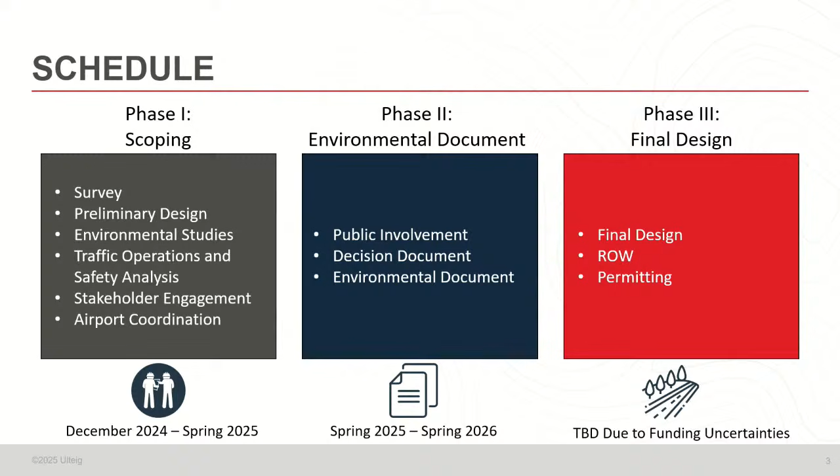Real quick, before we go too deep in the alternatives, I want to call out the known constraints that need to be taken into account when you're evaluating the alternatives. Key ones in this area are the gravel operation on the southwest corner of the intersection and the English Coulee watershed drainage ditch on the southeast corner of the intersection. There is a water booster station owned by the city of Grand Forks, which feeds both the airport and the Grand Forks Air Force Base, in the northeast corner.

And then most importantly, we have the runway protection zone off the Grand Forks Airport, which actually falls through US 2 on the south side. Those are very critical as you're looking through these alternatives, because all the alternatives will have different impacts on each.

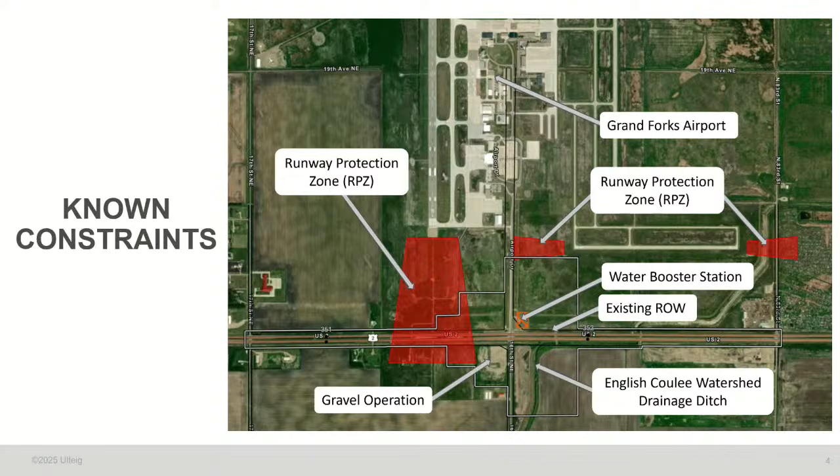Real quick, what we've completed to date: we've done all the field surveys. We've conducted a traffic operations report. We've completed the environmental studies, to include wetland delineation. We've had robust engagement with our stakeholder working group, which includes the city, county, MPO, and several others within the area. We've conducted a management presentation with the North Dakota DOT, and we've completed two public input meetings in November. I apologize, I said December. It was actually November. Time flies.

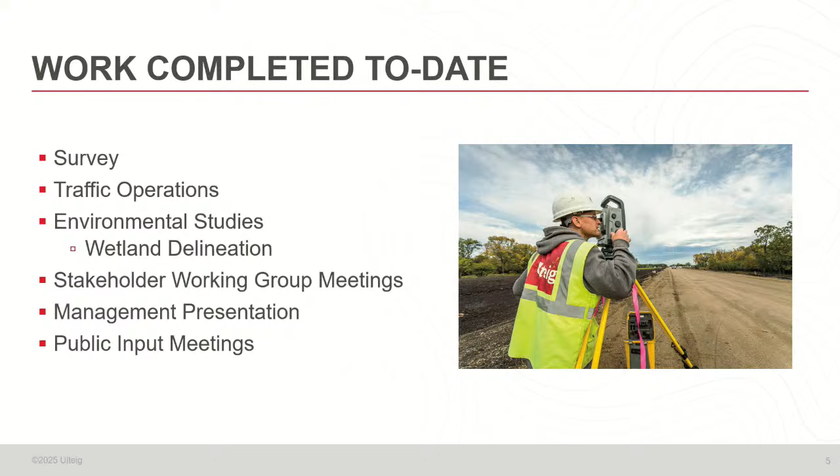So real quick, I do want to highlight that we've had a very engaging group of stakeholders. We've held four meetings. These first three are prior to the public input meeting, just to make sure we are aligned with all the organizations that have a stake in the project. To highlight, not all these words, but we started out this project with 12 different alternatives, really trying to figure out what works for this intersection in this corridor. In that first one, we discussed the existing geometry, reduced conflict intersection, revised geometry, staggered T intersection, roundabouts. Like I said, you name it, we discussed it.

With that, we saw a pretty quick delineation of steering towards the roundabout and interchange alternatives, just based on how traffic operates in this area and what we believe folks would be more amenable to, which led to our second stakeholder meeting, which really dove a little bit deeper into the interchange options and the roundabouts and just gave more information. And you'll see on the right-hand side there, a pulse check with all stakeholders. We started driving further into that roundabout alternative option, with the interchanges still within reason.

This led to a September 8th meeting, just really trying to hammer out what we wanted to show the public, so all the stakeholders were aligned. With that, we were still holding on to that roundabout alternative being the selected alternative of choice, with interchanges really close there too.

While we were doing the stakeholder meetings, we did hold a North Dakota DOT management presentation. I just wanted to talk about their guidance and feedback from that. When we went through the presentation, they really focused on the background and project overview, which all of you are aware of, this intersection and the issues that we've had over the years; schedule, known constraints, the alternatives still under consideration, traffic operations, and cost and funding.

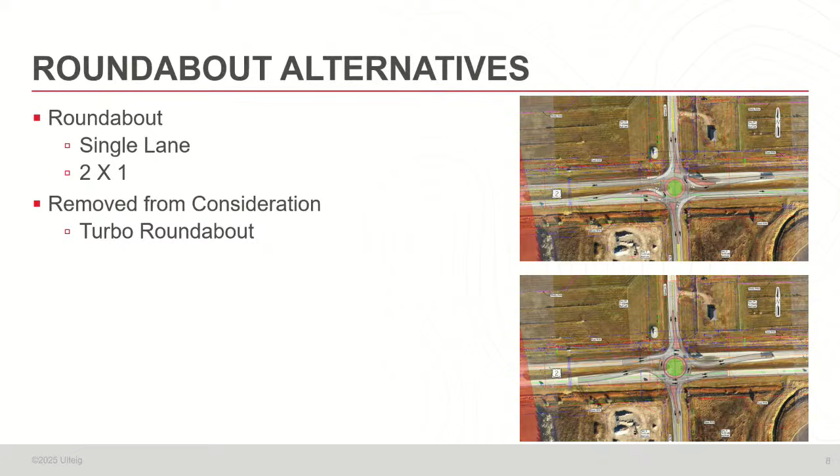On the interchange alternatives, you'll see here a diamond interchange. We called it a shifted diamond interchange. Essentially what we had to do to stay outside of that RPZ was move the interchange or the County Road 5 and Airport Drive about 300 feet to the east. What this does is it pulls those ramps going back onto US 2 away from the RPZ, so we're not introducing vehicular traffic within the RPZ. If we do impact that RPZ, we have to do a little bit more analysis in coordination with the FAA. But generally, good rule of thumb is don't impact RPZs. It's there for a reason. With that, once again, the partial cloverleaf, we pulled that away just to allow for those detours of oversized equipment.

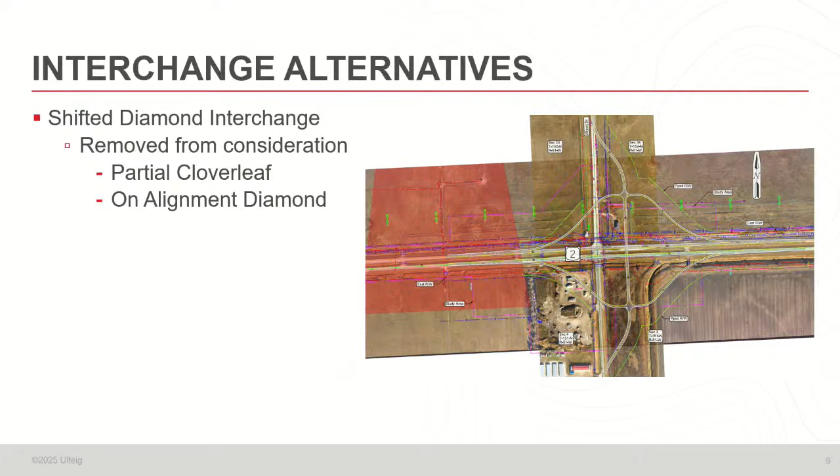Real quick on cost estimating and funding. As I said before, after the management presentation, they really had us do a robust analysis on the cost estimate. With that, they wanted to focus on inflation to make sure we have today's dollars, but how does that look in the future? With the roundabouts, we found it feasible to be able to get through the planning, design, environmental, and then ultimately construction within the next 4 years. So with that, we estimated $6.3 and $8.9 million respectively cost today, leading to $8.5 and $12 million cost in 4 years.

For the diamond interchange, with the amount of study needed to push a diamond interchange forward, that's going to lengthen out your environmental phase and then ultimately your final design and right-of-way costs. We'll talk about right-of-way a little bit here in a bit, but there will be right-of-way acquisition, which also lengthens that project development lifespan. And then overall, just getting funding and planning and construction, we're looking at about 10 years for the diamond interchange. So with the today's dollar of $46.2 million, 8% inflation, we're looking at $99.7 million in 10 years.

Real quick, with all this in hand, we did conduct 2 public input meetings. I just want to give a shout out to the Alerus Center, City of Grand Forks and Grand Forks County. They got us into the Alerus Center for free and really helped with participation. Number of attendees, we had 83, which is a pretty decent number. Results, we had 16 comments via email, mail, phone calls, and then 10 comments received during the Q&A portions of the public input meeting. Just a summary of what we saw in those comments.

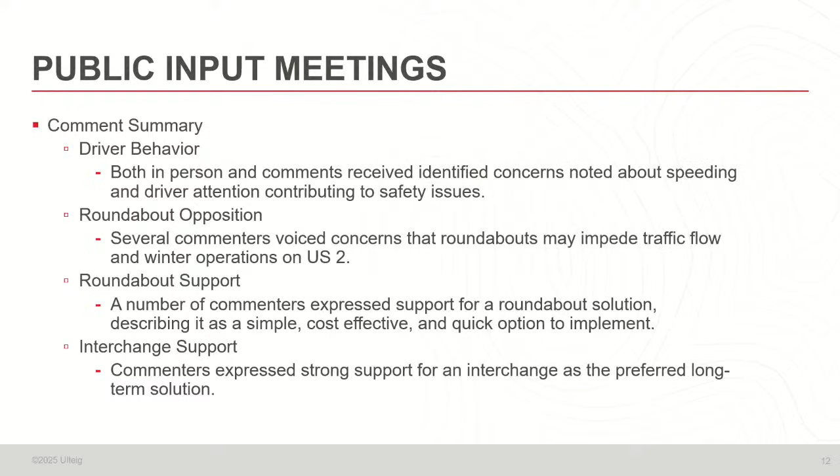As far as interchange support, I will say the interchange probably still had the strongest support, just for the fact that it's a very long-term solution. Allows US 2 traffic to not slow down, not stop, not be impeded, keep their speeds up there, and also County Road 5 and the airport.

Generally, public opinion favors the interchange alternative as it's familiar and known to them. The roundabout alternative supporters favor it for cost and expediency. There are, once again, lots of comments on speeding, distracted driving, and driver behavior. It's really tough, that doesn't fall within the scope of this project we're talking about today, but there is a lot of concern from the public on those items.

So real quick, before we get to the decision document, we did hold one more stakeholder meeting after the public input meeting and shared all that information with them. And we had a resounding collaboration, cohesion around the roundabout option, mainly because it is something we can implement in the near term. So overall, the next step is the decision document.

It's going to outline purpose and need for the project. The alternatives we put forth in the decision document are alternative A, no build, a roundabout single lane, a roundabout 2x1, and a shifted diamond interchange.

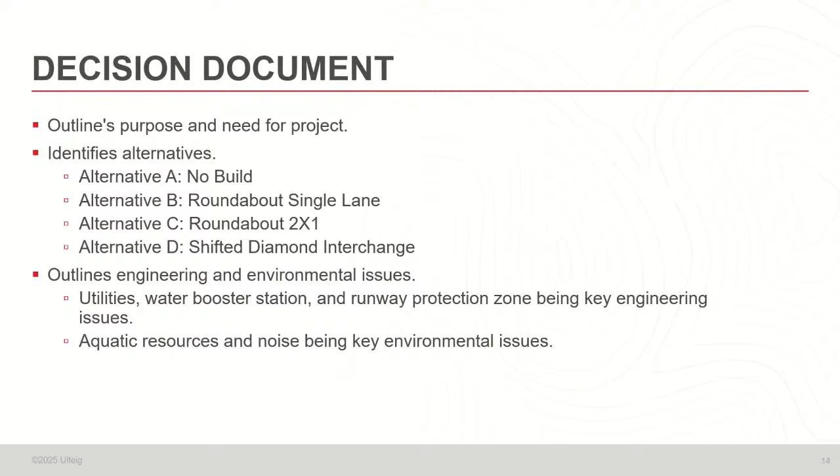Engineering environmental issues, just to keep in mind, utilities, there will be utilities impacted throughout the corridor, the water booster station, the runway protection zone being key issues. And then on the environmental side, aquatic resources for both. And then if an interchange is introduced, we'll have to do a noise analysis to determine what the impacts are there.

So real quick, I'm not going to read all this verbatim. I'm just going to highlight some of the key pieces. Both the single lane and the 2x1, they're both going to give you greater operational advantages to what's existing today. They are going to be able to handle future traffic. We did the 2050 timeframe for traffic analysis.

They are going to reduce crash potential and severity at this location. And there's going to be fewer stops and hard accelerations at this location. Versus the interchange, they're going to be lower cost, quicker to implement, and minimal right-of-way needs.

Some of the disadvantages to the roundabout is complex phasing, which we can figure out as we get there. And then traffic will still need to slow down and yield before entering that roundabout. That is something the public kept asking, and I want you all to be aware of. Yes, you will have to slow down as we get to the roundabouts.

Two differences between the single lane and the 2x1 I want to call out is the single lane had a little bit less crash potential than the 2x1. The 2x1, what we're seeing is there may be the potential for large truck traffic to encroach on adjacent lanes as they go through the roundabout.

The advantage that the 2x1 has over the single lane is it has greater operational capacity for future traffic. And then as far as the northbound, southbound minor legs, they're able to get into that roundabout quicker than a single lane. A single lane might have to wait for that gap to open up on US 2.

As far as the shifted diamond interchange, the biggest advantages obviously are you're maintaining continuous flow on US 2, eastbound, westbound, and then County Road 5 and Airport Drive, northbound, southbound. Reduced travel time due to less congestion, and you're going to provide greater operational advantages in the future. Everything we're seeing for numbers, you're not going to put that interchange at capacity.

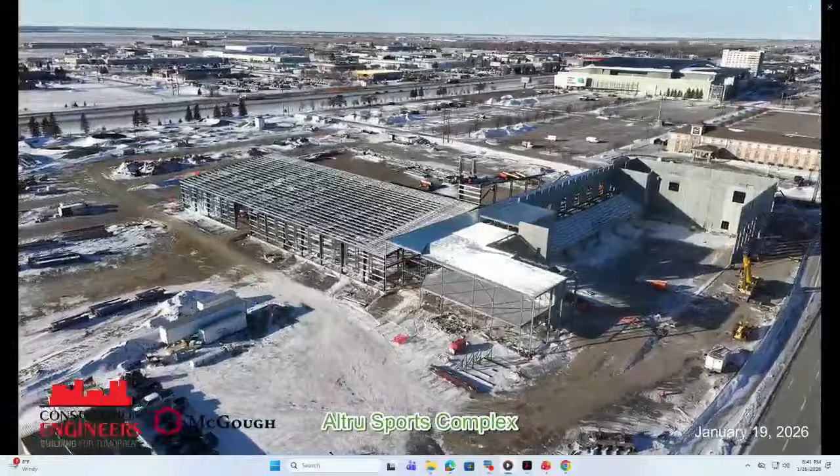Good evening, Council. So I think we're going to start with a phase 1 update. So we have a drone video here from McGough Construction and Construction Engineers. I'm quickly going to turn over to the McGough team here to give us an update on phase 1. They're the ones out there all day in the cold here. So I'm going to turn it over here to Brian. Give us a little update here on phase 1 and what you're seeing here.

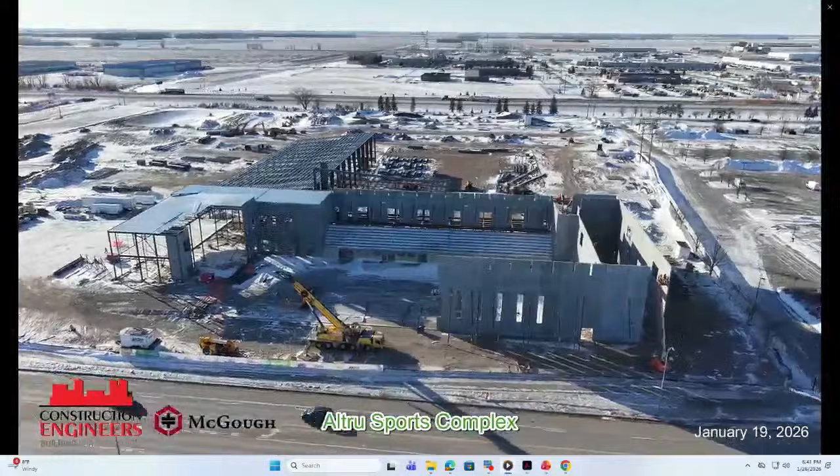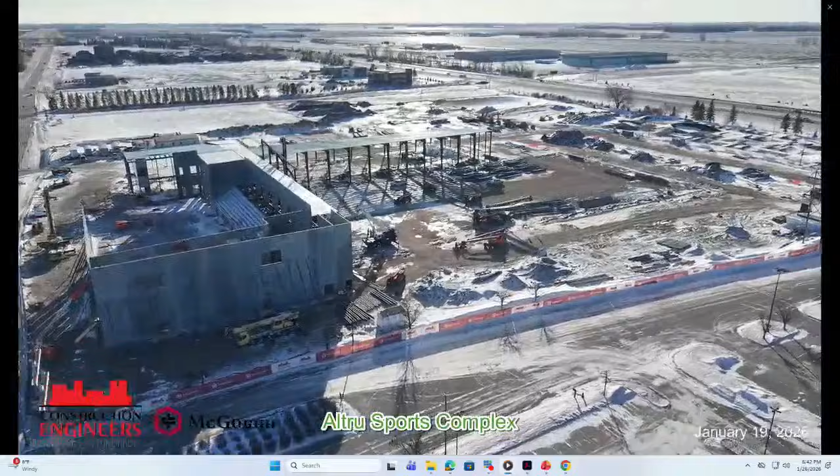Yep. So I'll take it. Good evening, committee members and Vice President Wago. I'm Brian Lambrick, Senior Project Manager with McGough Construction. So I oversee the day-to-day operations of the Altru Sports Complex project here. What you see in front of us is a drone video that we took last week on Monday.

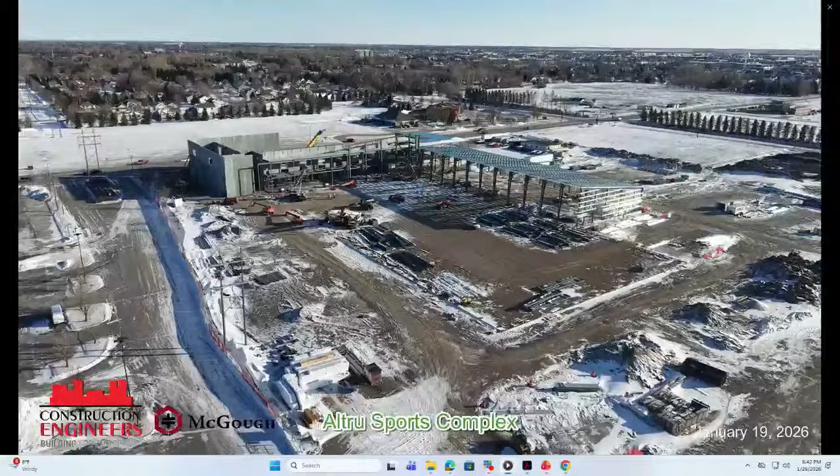Really the course of last summer and this fall was we were really focusing on all of our underground activities, foundations, site utilities, getting the pool slab down, all the underground plumbing for the pool. All of that's in place currently and buried now. And really, if you've driven on 42nd in the last couple of weeks, you'll notice that all the structures are really coming up and out of the ground.

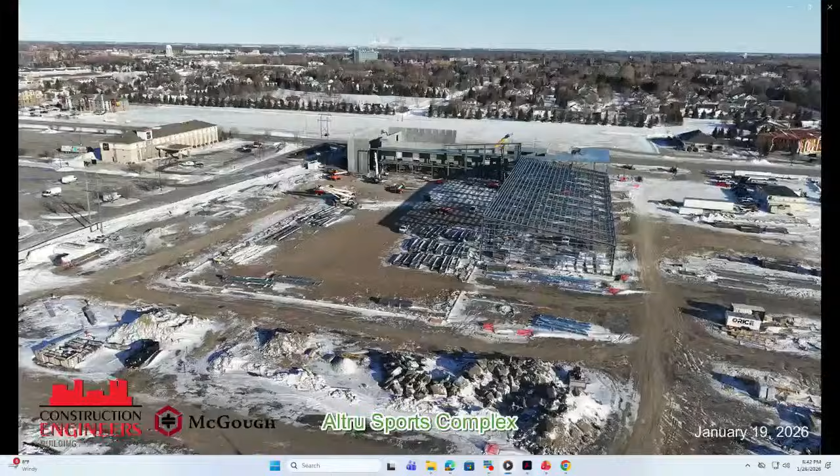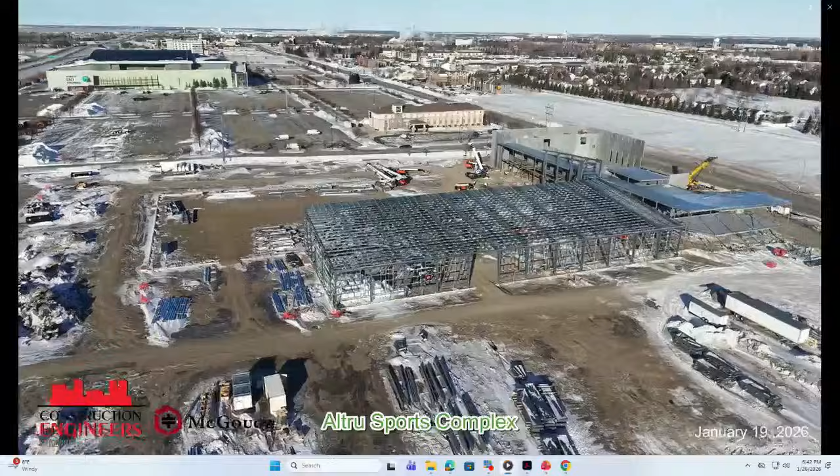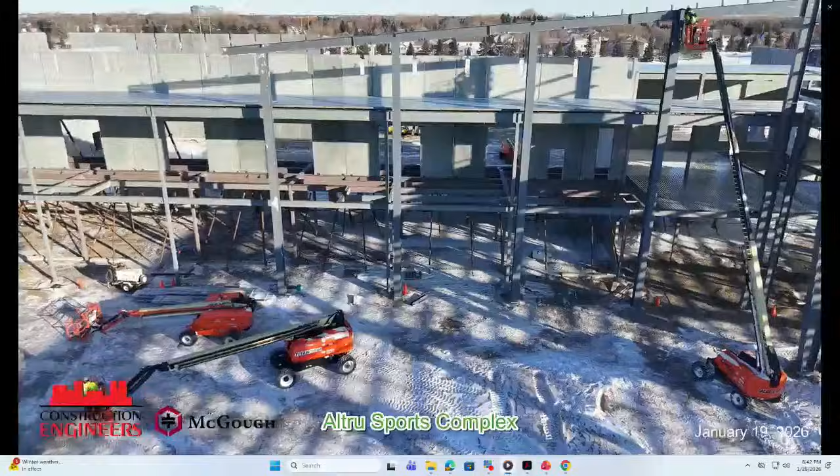So what you'll see in front of us right here, that silver box right in the front of the screen here, that's the pre-engineered metal building for the pickleball courts. That structure is complete. Really now it just needs to get enclosed and wrapped up. What you can kind of see here is just the start of the end wall of the turf. So that angled beam across the screen, that's the end wall for the actual turf pre-engineered metal building. And then behind that, you can see the concrete panels. Those are the precast panels for the natatorium space.

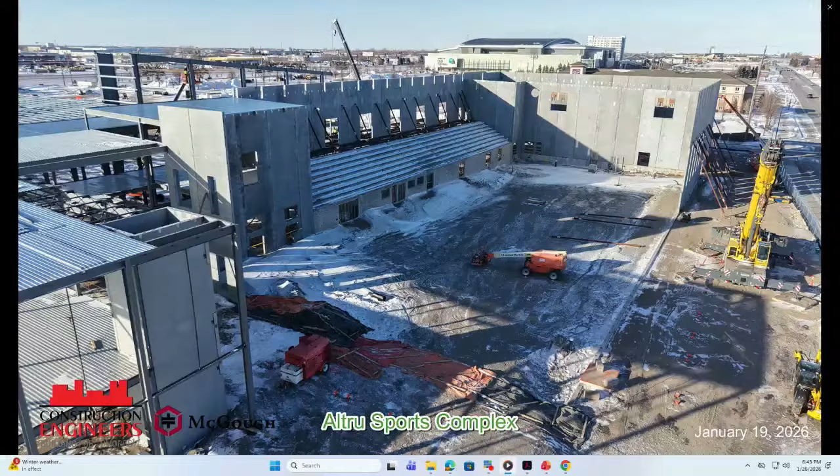Again, here's another view of that natatorium space. What you don't see where that orange lift is sitting right now, buried underneath that, there's about 5 feet of sand and gravel covering all the pool base slab and plumbing underground, things like that. So as of Wednesday last week, all that precast is erected. So you can kind of see it wasn't finished as of Monday, but now that work is complete.

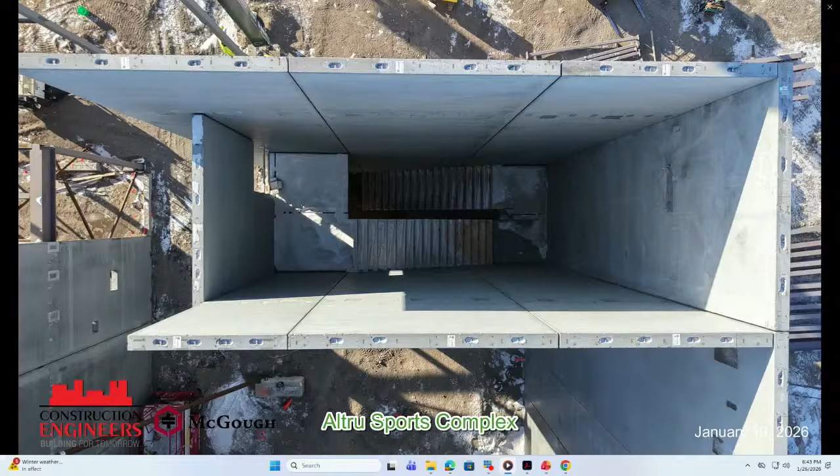So really, the rest of this winter is just going to be focused on getting all of our structures up. From there, we'll kind of roll into our enclosures, getting the building weather tight this spring and summer. And then really that last year or so of the project is just going to be doing the finishes and fit out inside the building.

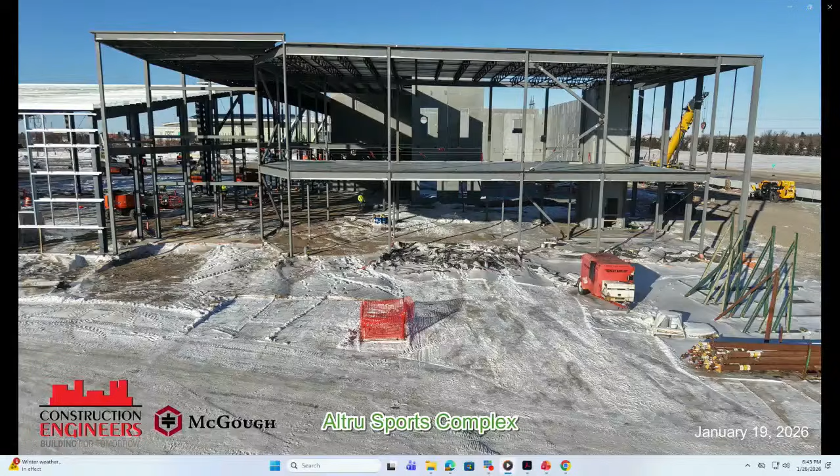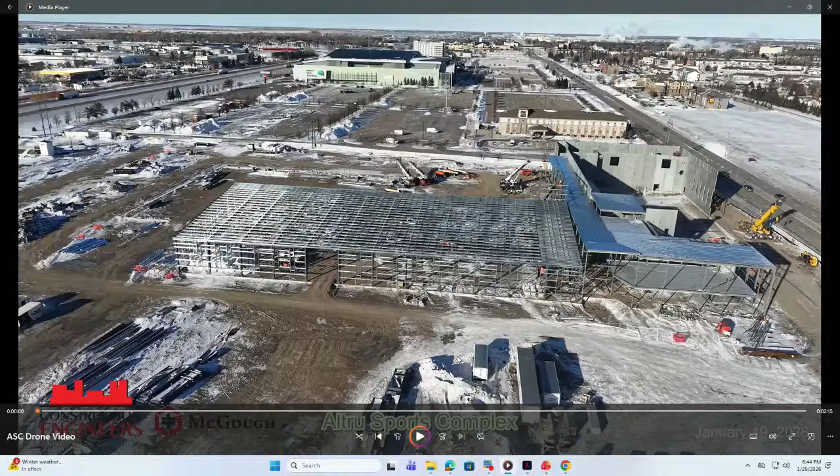So ultimately, construction is going very, very well. We're on schedule, still tracking for a September completion date of 2027. And then we're still on budget. We're actually slightly under budget, which we'll talk about when we get into some of the phase 2 numbers here. So any questions on current construction status? No questions. Awesome. Thanks, Brian.

Appreciate that. Well, when we switch gears here to phase 2, the bulk of our presentation tonight will be on phase 2 and giving that update. So let me switch gears to that presentation. So where I will start today is going to be on schedule. So this is the project schedule for phase 2. I'll call your attention to the top blue row there, schematic design and programming. This is the phase that we're just completing and what we've been doing over the last 16 weeks.

So we've had a couple of really, I think, in-depth stakeholder meetings with the Park District and some of the community organizations out there for basketball, volleyball, wrestling, etc. Really, as we work towards refining the design concept into a plan, a program, and a budget to move forward, which is why we're here today to present that to you all.

The next steps that we would have here, as Mr. Phelan mentioned, are to move into the next phases that we're requesting to do more refinement and to get more detail and to really work towards that market and budget numbers. And so design development, construction documents, and 2 bid packages would occur, which is a very similar process to what we did for phase 1. The idea is to do the expedited project delivery. I'll show that here in just a couple of slides to kind of remind you all what that is.

But the intent is to overlap our phases, get to the market soon, really have some of that time savings so we get out there, especially when we have phase 1 already under construction, the construction team already out there. There's a lot of savings we can have as a project to get this out to the market and under construction at the same time that phase 1 is out there.

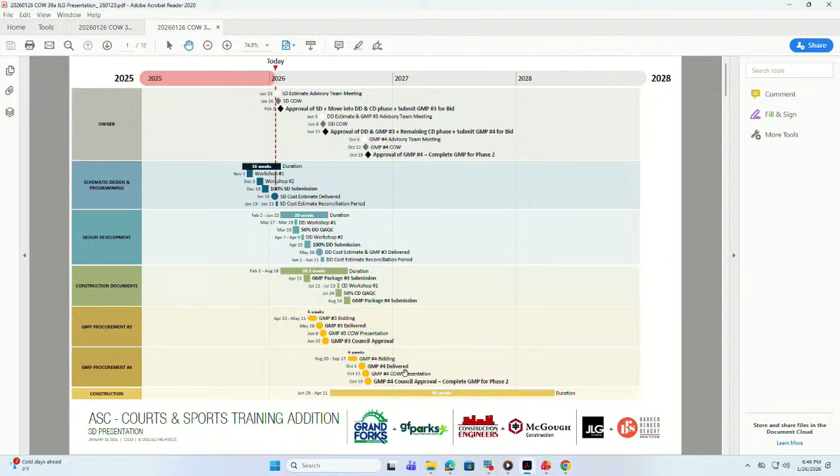I'm going to transition over to budget, and so I'm going to call up here Oliver Finman to talk about the budget. Again, some good news here on where we stand today, and we'll give you a rundown of the budget numbers for the whole project. All right. Well, this document should look familiar, as this was the same document that we used for phase 1.

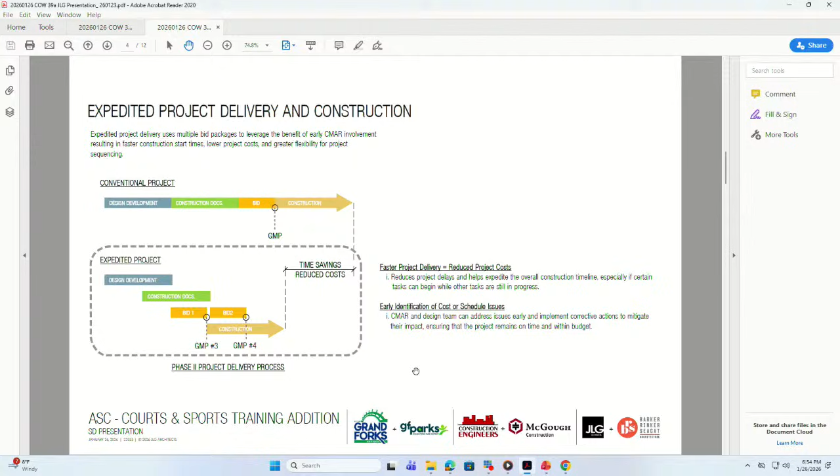And the reason why, and Mr. Vien, you're leading to that too, a little bit of escalation, is we already have a team out there under construction. We want to get out there. We really want to realize those project savings that we can have by getting out there sooner rather than later. So just a recap of why we're asking to do this process and to do it that way. You can see here with GMP3 and GMP4, some of those reduced times help to create savings. So very important to understand. But again, the same process that we did last year in phase one.

In addition, just to let you know what is in GMP3 and GMP4. So again, GMP stands for Guaranteed Maximum Price. These are final drawings and specifications for bidding purposes. And so the first one, GMP3, that we would ask of you here today, would go out in April, would come back to you here in June, and would cover about 55% of the scope of phase two. That would encompass all of the building foundations, all the building structure, and the building enclosure. Again, almost identical to what we did back in phase one.

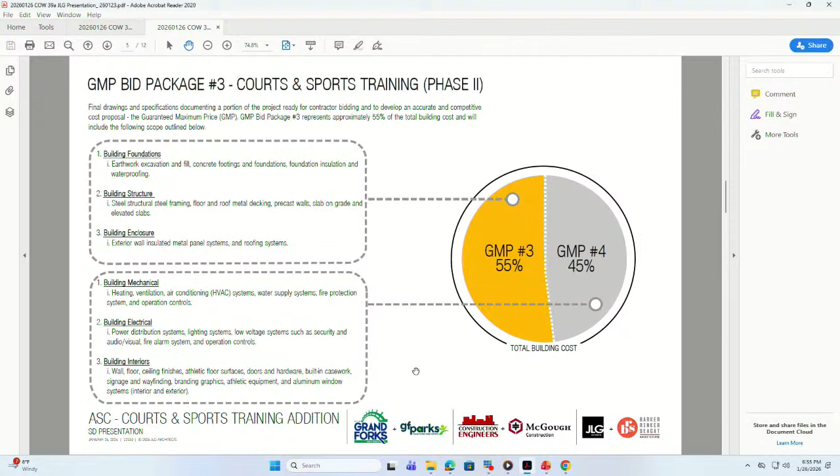When we come back again, as long as things go to plan, in August and then October, that's going to be for everything else really in the fit-up of the building. So all your mechanical, your electrical, and a lot of your interiors, the gym flooring, etc.

So a little bit of the fun stuff here. We brought a few slides from the schematic design package that we delivered to the city and to the park district. And so we're not going to go over the whole package, but just a few choice here to give you an update on the design and where things lie. Very similar to what you saw with the concept plan back in last fall with a little more detail to it. But we'll cover the site here real quick first.

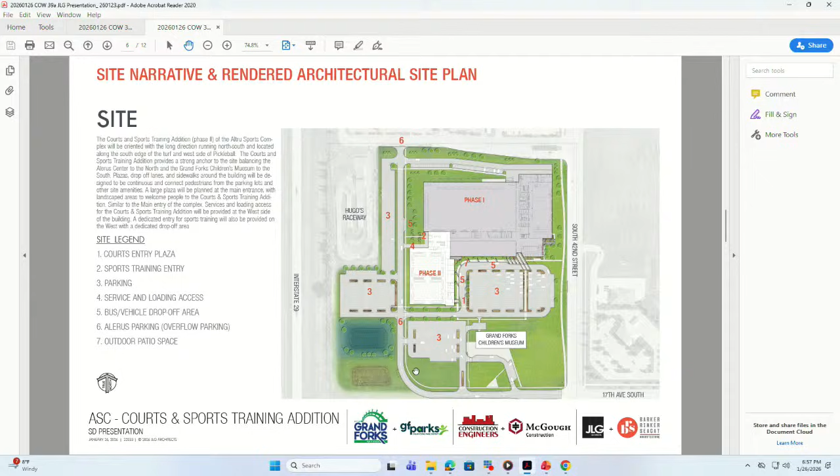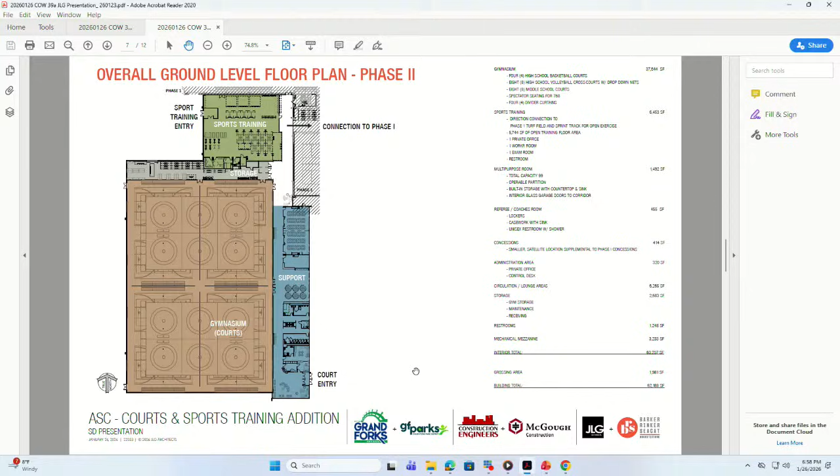We'll jump right into the floor plan. So we are just a little bit over 62,000 square feet, primarily on one level. We do have an elevated level for the mechanical mezzanine and the mechanical equipment. It's about 3,000 square feet. So pretty small, but the majority is going to be on the main level and really 4 main categories. We have the gymnasium, which you can see there in brown. We have the sports training at the north in the green, storage, receiving, load-in in the middle, and all of our support spaces that we have there.

I'm going to go through in detail, moving north to south on some of the spaces here, and try and hit the highlights. The main thing about the sports training was to maximize the amount of open floor gym space that we have adjacent to the turf. I think one of the synergies and the critical piece for sports training to be successful is to have that direct access to the turf area, where we have the sprint track and the sprint turf and the turf area already part of phase one. So the location was really driven by that.

You can see there's direct access to the exterior on the west, helping support and really promote and grow their programs with that direct access, and maximizing at about 5,700 square feet the open floor athletic training space. They really will have some of their own support spaces within there. So they'll have some admin spaces, they'll have their own restrooms, they'll have kind of a trainer exam room located in there as well, an analysis room to help with program and bringing people in, their own storage and access to storage. So really kind of a self-supporting area within the facility.

In the middle of that long bar, that's really going to be the primary gymnasium storage, maintenance, receiving. Again, it's something that we relocated over from phase one. And what's important to understand about that is that helped free up additional storage now over by the turf. So some of those areas where we have the maintenance loading can go over to the new phase two portion of it, and we just opened up more storage for the turf area. So it did help with some synergy on that front.

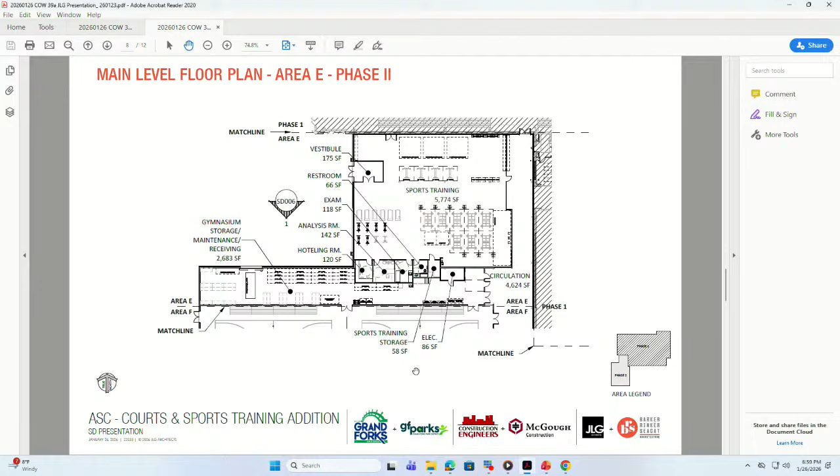The courts. So the courts are going to be, if you recall, 4 high school size courts. They will be divisible into cross courts by 8. So 8 high school volleyball and 8 middle school. These are modified middle school. So they're 50 by 64, but nonetheless middle school size.

Also sized to accommodate 768 spectators, depending on the configuration for the courts. It'll be the 4 high school courts. It'll be the cross courts for volleyball and for middle school. Wrestling would have a little bit of their own configuration with that, depending on the number of mats. You can see here we are showing the mats in a large space, so that would work out. But 768 is that number we arrived at that really works for a lot of things with the facility.

And then all the support spaces on the east side. So just like the other areas of phase one, turf and aquatics, we have its own multi-purpose room. So this is divisible by 2. So it's a larger multi-purpose room, can be divided into smaller multi-purpose rooms. Again, for community needs, for hospitality during tournaments and for events. And it's just another configuration for those multi-purpose spaces, just like in phase one, that would help support the courts.

There will be a small concessions and lounge area that is really a satellite to the main concessions over in phase one. So we're not duplicating any of those services. It's just going to be a smaller satellite. So anything that happens in concessions in phase one would be carted over or brought over here to help support those on certain tournament days.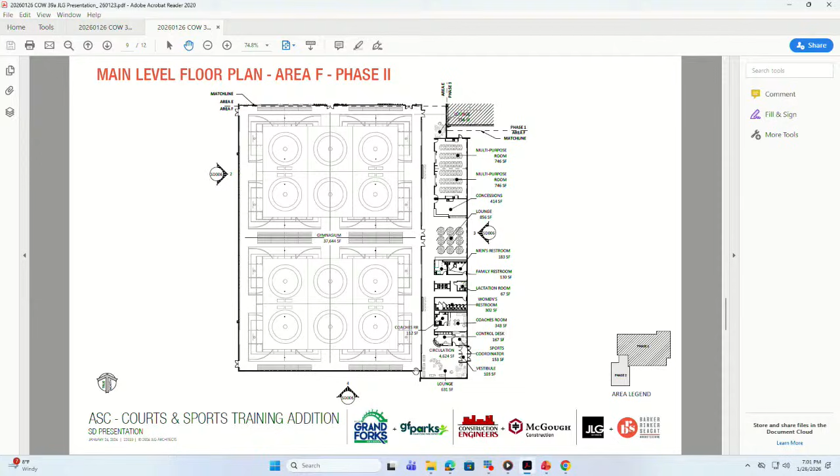Of course, we have restrooms. We'll have the officials and coaches room, just like we do in phase one, which is really important for tournaments to have those dedicated officials and coaching areas that they can go to. So we have one in phase one. We'll have another one now with phase two. And then we have some control desk and administration areas along with that as well. Again, that corner there is the southeast. That really is considered the main entrance to phase two.

Just a couple of quick snapshots of phase two and phase one together. Up here on the top one is going to be the view from 42nd as you're looking northwest in this case. Hopefully we've been successful in really integrating phase two with phase one, so it does look like one intentional project, not 2 projects. You can see the bottom one here is a close-up of the main entrance to the courts.

And just to go back up to the top image, with the new entrance to the courts, we didn't want to try and take away from the main entrance. So it's really important that we have those different scales of entry points as we use the facility. Wayfinding with large facilities is very important. And so we want to make sure that the architecture responds to the wayfinding in a way that helps support that. But it does need to speak entrance as you're using the courts, whether it be day-to-day or for a tournament. You have to know that. I just want to point out that little subtlety there.

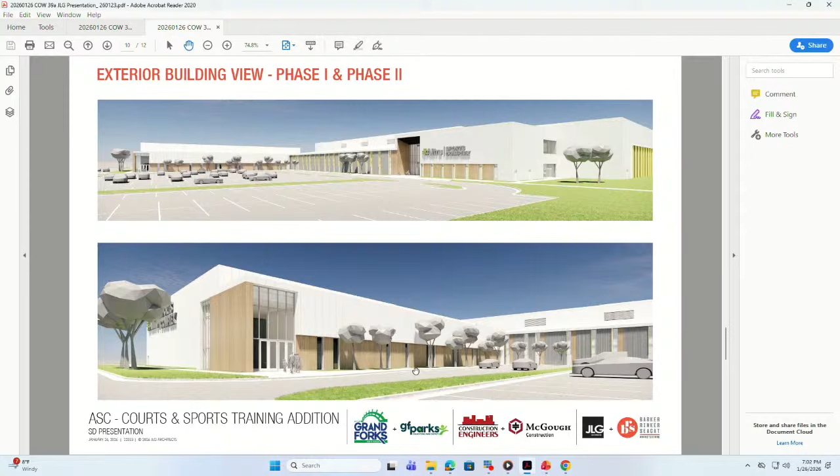But all in all, we feel very, very confident and very excited about how everything is integrating together and really supporting one cohesive design. This here is just a quick rendering of the courts on the inside. You may recognize the pattern of windows over there on the west side, very similar to what we have over at pickleball, very similar to what we have at the turf and also at the natatorium.

So this would be the glazing we're using, which isn't clear glass, but it's daylight diffusing glass. So again, we're not getting that glare from the west on the courts. We're getting just that really great diffused natural lighting.

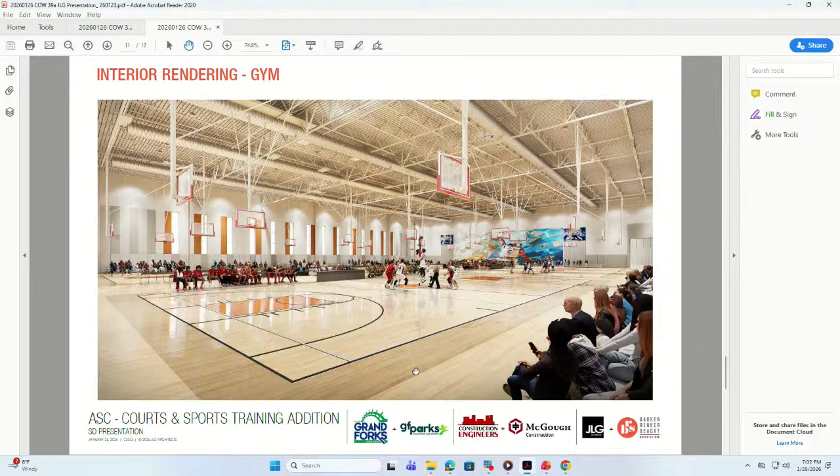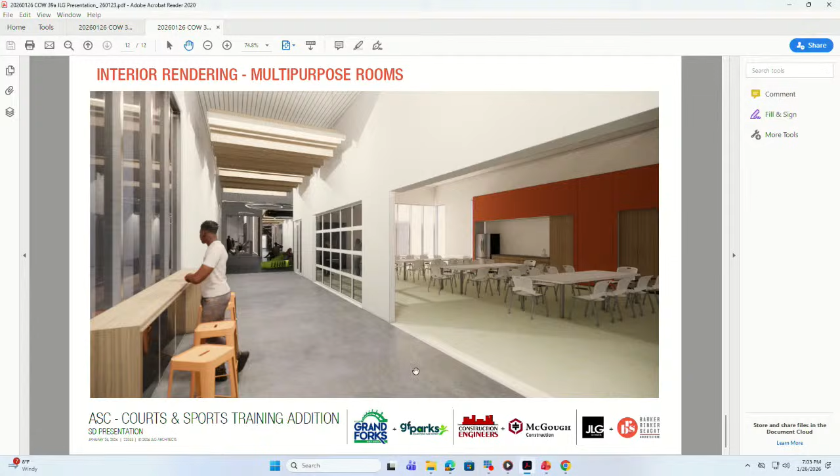And just a last quick image here: this is the multi-purpose rooms in the concourse. This is an in-process rendering, so not as polished as usual. But to give you an idea of what the multi-purpose area looks like, the difference with these ones and the 2 in phase one, we have these operable glass doors here to really help with certain hospitality events, to really open this up and make this a truly multi-purpose venue. So with that, that completes the phase 2 architectural update.

I think the next is transition over to the Park District. Or are we doing finance and Marie? Marie, why don't you go? All right, thank you.

Just want to give a little review and an update on the financing. As you remember, this is coming from a city sales tax. We went to a vote of the people back in November 2023 to not only cover the ongoing capital and current debt service on the Alerus Center, but to expand the use for the funding of this facility and ongoing capital and removing that sunset. Received very, very good support behind this with 66% approval on that 3/4 cent sales tax. So that's your funding source for this.

We put the numbers together, came up with a $110 million budget that we've had going through this. And I just want to provide an update on that. That included the $100 million financing or borrowing and $10 million cash. As a reminder, we went out and did the temporary financing through Wells Fargo. Very, very good interest rate on this temp financing at 3.54%. That takes us through December of 2027 when we'll look to issue a permanent bond for the ongoing payments for this facility.

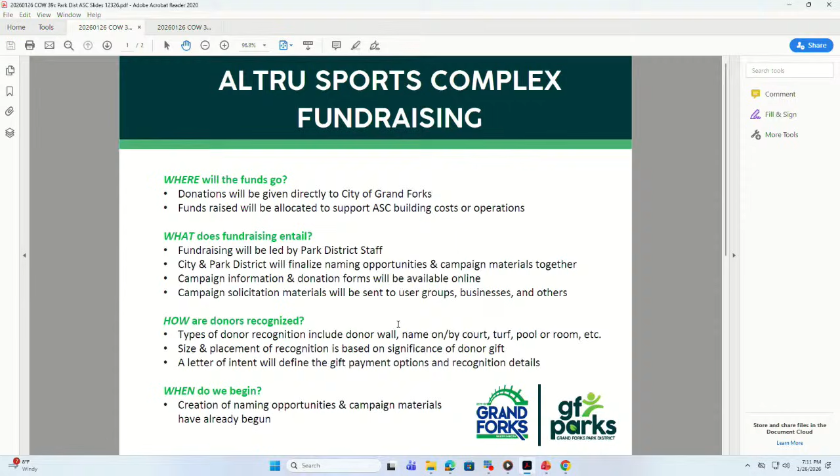On the operations side, we got the projections that we've been working hard on for a while. Again, for projections, there's no crystal ball for these numbers. These are our best estimates, but with that being said, we've put significant time into this to come up with the best estimate we possibly can. Our staff has put together over 20 work sessions working through these numbers. We hired an outside consultant for national and industry standards. Rental rates, we've looked at regional comparisons from around the state. Expense comparisons, we've reached out to Fargo Parks Sports Center to look at some of their numbers, Bismarck Aquatic Center for what their numbers are. Obviously, Choice Health Fitness and Icon.

So the numbers you're looking at, what we tried to do is look at realistic numbers. We didn't want to be super conservative and we didn't want to be super aggressive either way. So we tried to use realistic numbers as we work through this. For the total revenue, you can see for phase 1, phase 2 is just shy of $2 million. Total expenses would be right about that $2.6 million is what we're projecting.

For staffing, we've hired a general manager. So Lisa Rolfstad's in attendance tonight. She's going to be the general manager of Altru Sports Complex. And then we're projecting having 7 full-time staff for phase 1, and if phase 2 moves forward. So we'll look to hire 6 other staff employees over the next, one in 2026, and the rest would be hired in 2027.